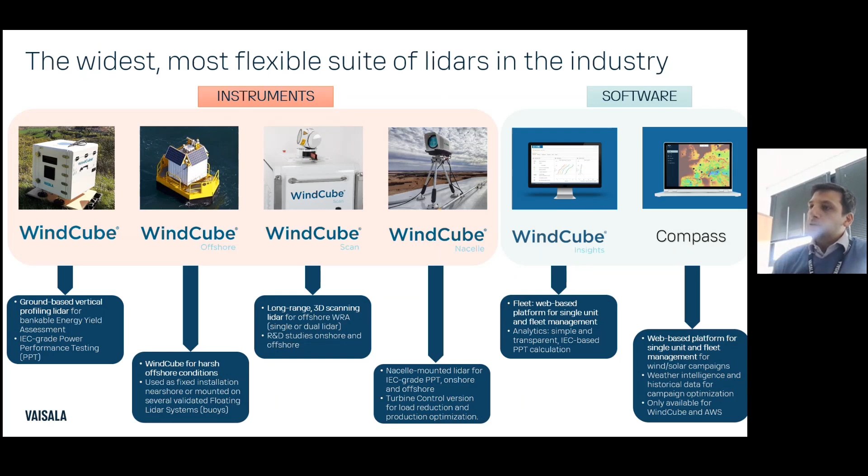Then we have the WindCube Scan, which allows for long distance measurements, which is widely used for performing WRA offshore from the coast. And lastly, the WindCube Nacelle that is used for checking the performance of wind turbines, as well as to perform LiDAR assisted control to improve the production of the turbines. On top of that, we have an extra layer with the software, including our recently released software called Compass, which allows fleet management and helps combining measurements with historical data to manage the full campaign.

So if we go now to the project itself, what's the motivation behind this project? I think you all know having a more precise measurement of the turbulence intensity is one of the most important challenges when assessing the wind conditions. The turbulence intensity is used for several calculations, including load validation, turbine siting, energy yield assessment, site suitability, wake losses, and others. So clearly having a good quality measurement has a strong impact on the success of a wind farm, from a financial point of view, especially.

So what are the current challenges to measure turbulence with LiDARs? In some conditions, LiDARs tend to underestimate or overestimate the turbulence intensity. You saw some of these effects in the former presentation. This applies to all LiDAR manufacturers, and it's not related to the WindCube itself. It's related to the way the vertical profilers work.

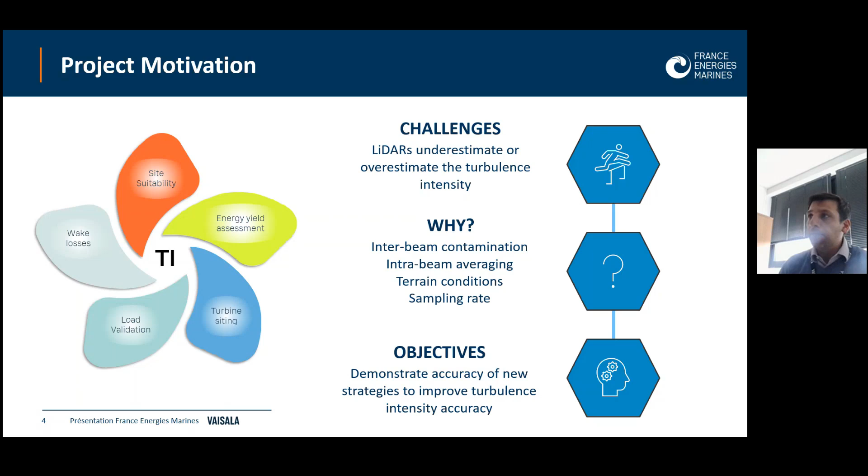And so why is it so challenging? I will go in detail in the next slides, and some of them were already mentioned before. There are different effects related to the position of the measurements, the volume of the measurements, the terrain condition, and also the sampling rate. And the objective here is to demonstrate the new strategies to improve the turbulence intensity measurements, and also to show you some of the future perspectives.

So let's take a look at some of the specifications of the WindCube that are mainly related to this project. First of all, the measurement frequency. WindCube will measure each line of sight around 1 second and move to the next line of sight. The wind field is reconstructed at 1 Hz, and the 5 lines of sight are measured.

The other parameter that is important to consider is the volume of measurements. All lidars will measure a certain volume, not a point, like an anemometer. In the case of WindCube, which is a pulsed lidar, the volume is constant with height, which means that the spatial accuracy remains constant at all heights, as you can see in the slide. And I will go into more detail in the next slides about this feature and why it is important for this project.

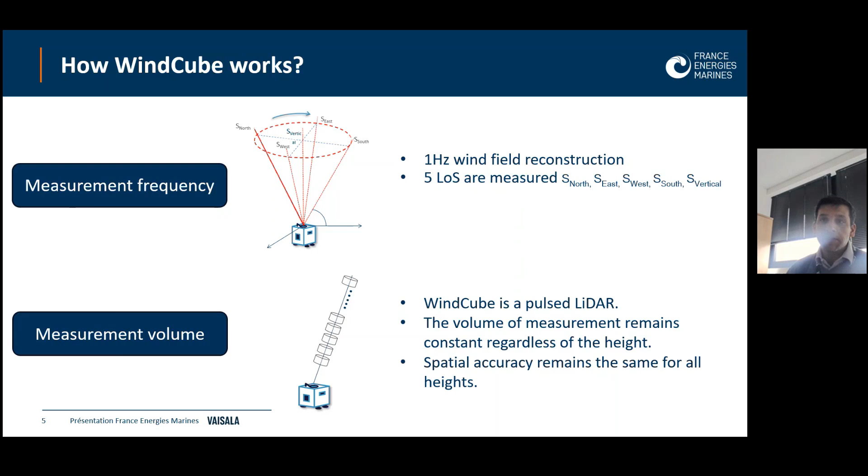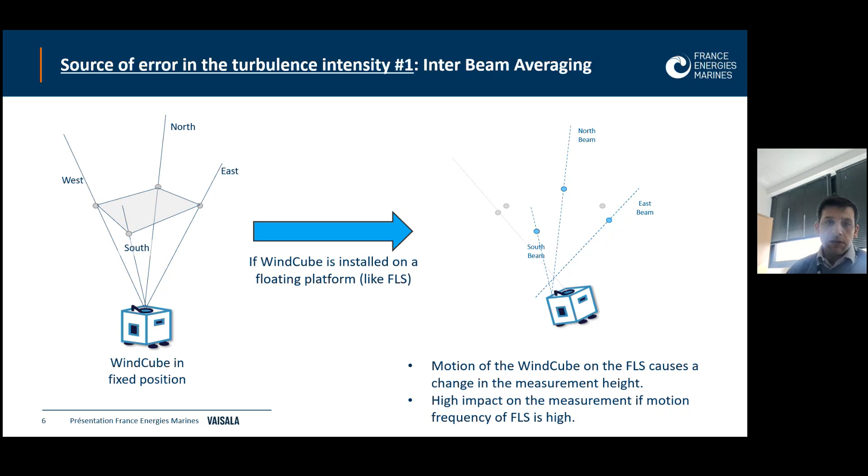So one of the sources of error is the interbeam averaging that was mentioned before. The wind field is reconstructed using the 4 lines of sight that are not located at the same position, so same height but different location. In the case of a floating lidar, this effect becomes much more important. Depending on how fast the floating lidar is moving and the frequency of the motion, this effect will become much more important in some cases. And this will have an impact, of course, on the turbulence intensity measurements. And I will show a potential solution later.

The other source of error comes from the volume of measurement. Because of the accumulation time, when the buoy is moving, the volume of measurement will be moving. Without motion, the WindCube is measuring the same wind field, but with motion it is measuring different heights and mixing different wind fields. Of course, the frequency and the amplitude of the motion will have an impact on this effect. And again, depending on the type of buoy, some buoys move faster than others, the impact will be higher or lower.

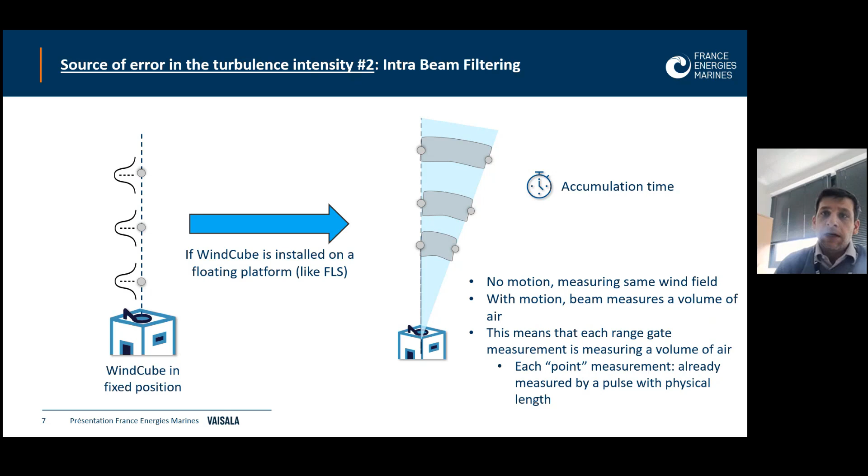The solutions for the interbeam, which is related to the reconstruction using the 4 LoS, will be to increase the sampling rate as a potential solution. I think there was a question before in the chat about this. So the standard configuration, it's what we call the 1 Hertz. It's related to the accumulation time. This is the commercial product. The customized, let's say, version of the WindCube using this project has a reduced accumulation time. So it's spending less time in each line of sight. So the effect of the motion is less important. So you fully reconstruct the wind speed before the motion becomes important.

The other effect, which was the intrabeam related to the volume of measurement, a potential solution is to reduce the volume by using shorter pulses. And there was a proposed method and test by reducing around 30% the volume of measurement, the length of the probe. And this was tested, but the results didn't show a great impact, an improvement in the turbulence intensity. But of course, this is something we should probably look into in more detail.

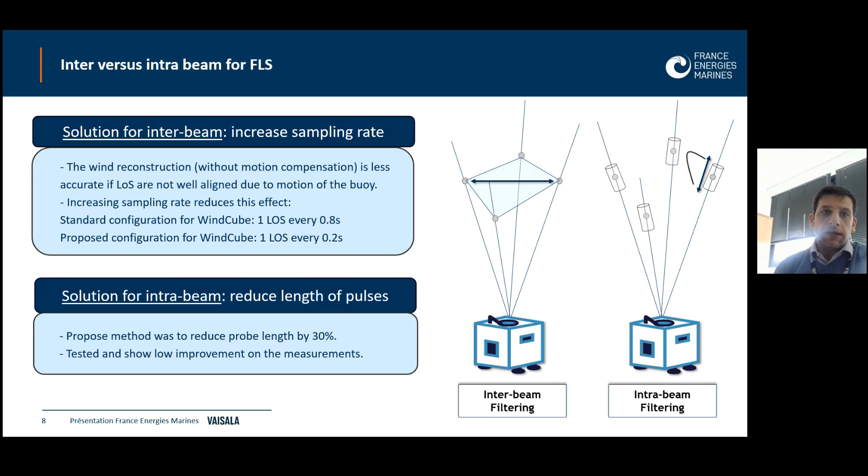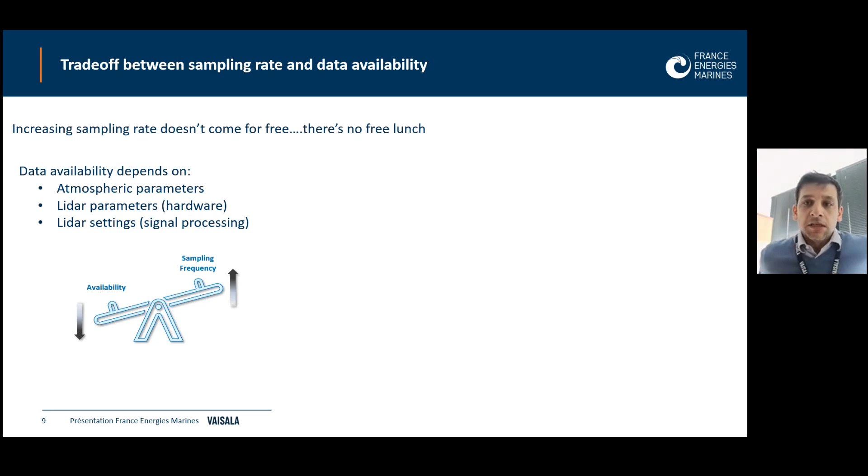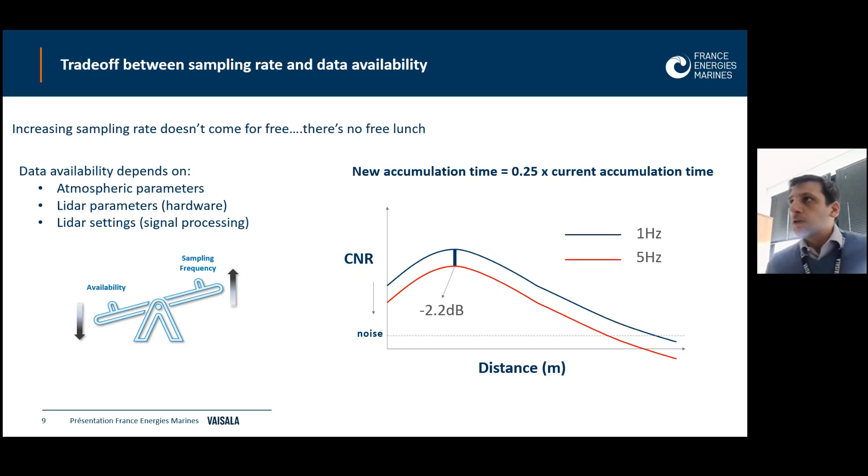So now we focus on this solution for increasing the sampling rate. And as one of my colleagues likes to say, there is no free lunch. So this doesn't come for free. Data availability depends on several parameters. The sampling frequency, which is related to the accumulation time, will have an impact on the data availability. So we can go faster, but the faster we go, the less data we accumulate, and having less availability will have an impact on the accuracy of the measurements. So there's a right trade-off to see what's the best condition. We found that this reduction was actually a good trade-off without losing much data availability.

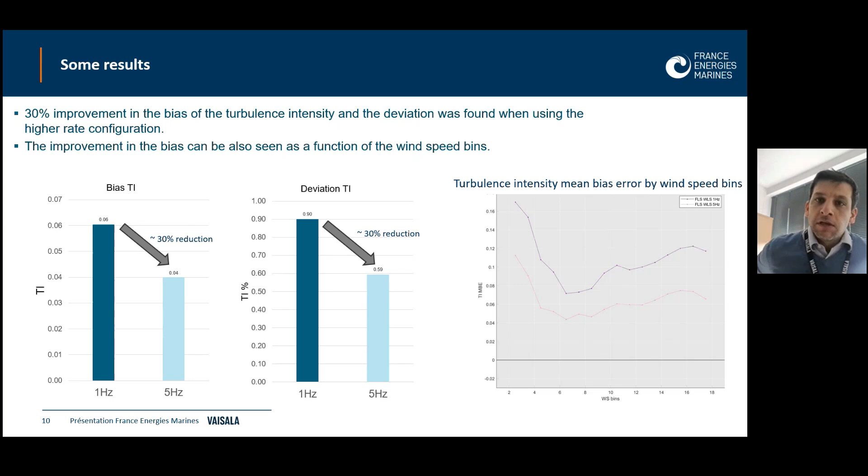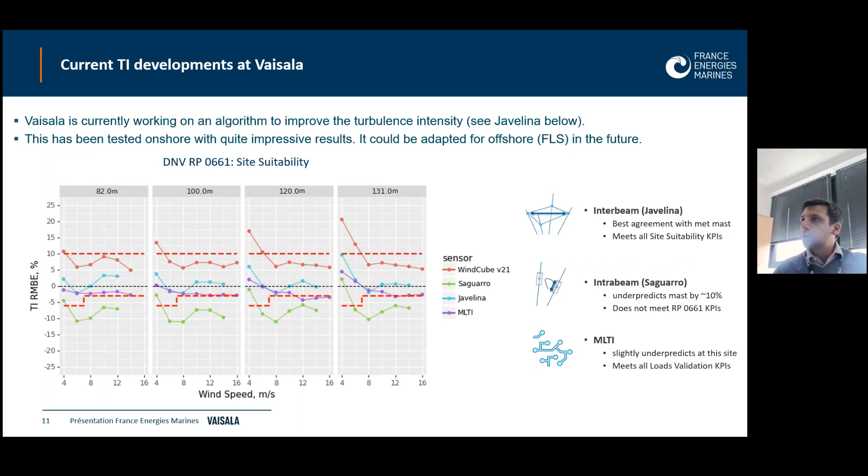But here, what matters is actually the last development we had, in the graph presented as Javelina, which shows a really good improvement in the TI for all wind speeds. And this is something we are trying to push in the future, and our scientific team is working on developing this approach. And we hope to be able to share more in the future. We have also tested other ways to improve the turbulence intensity, like using machine learning and also other methods. But this method, Javelina, which is basically compensating for the interbeam, has shown really good performance.

So to conclude, I showed you the sources of errors in the turbulence intensity. These are well understood, which is already, I think, a good first step. Once you understand what's happening, it's easier to try to find a solution. I also showed you that increasing the repetition rate shows an improvement in the turbulence intensity measurement. This is especially important for floating lidars, for platforms that are moving. I also showed you briefly some of the developments we are currently working on to improve the turbulence intensity, where we have this great candidate for the future.

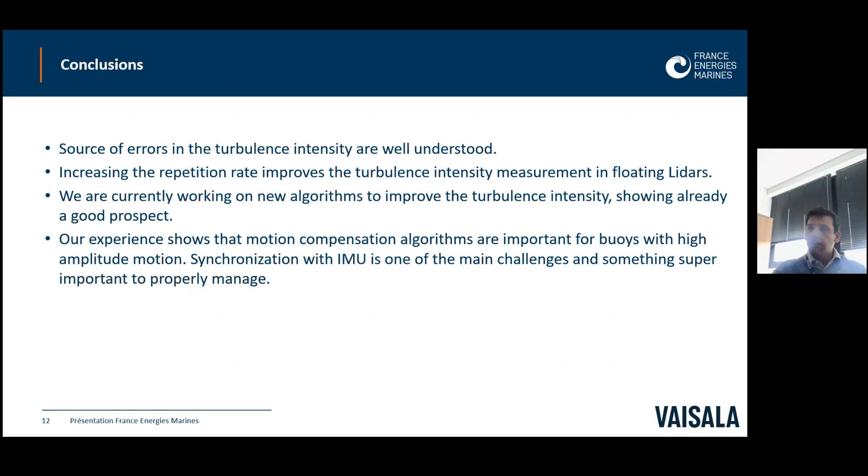And lastly, I'd like to mention something that I haven't talked about during my presentation, which is motion compensation. This is quite important, especially for buoys with a high amplitude of motion. And in these cases, when you apply motion compensation, what is challenging and really important is the synchronization between the IMU, the inertial measurement unit from the buoy, and the timestamp from the measurements.